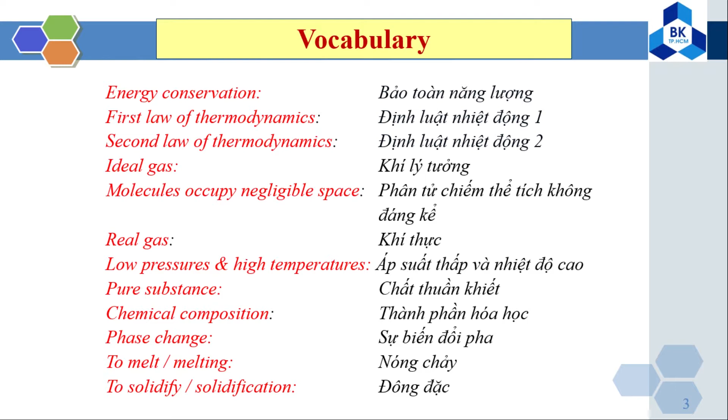Phase change. To melt. Melting. To solidify. Solidification. To boil. Boiling. To condense. Condensation. To sublimate. Sublimation.

Compressed liquid. Saturated. Saturated liquid. Saturated liquid vapor mixture. Saturated vapor. Superheated. Superheated vapor. Quality.

Vapor power cycle. Rankine cycle. Refrigeration cycle. Thermal efficiency. Coefficient. Coefficient of performance.

Alright, so now we start the lesson. First, we will talk about the first law of thermodynamics. As you know, the first law of thermodynamics is actually a different definition of the energy conservation law. They call it the law of conservation of energy, the same. You learned it a long time ago in high school or even secondary school.

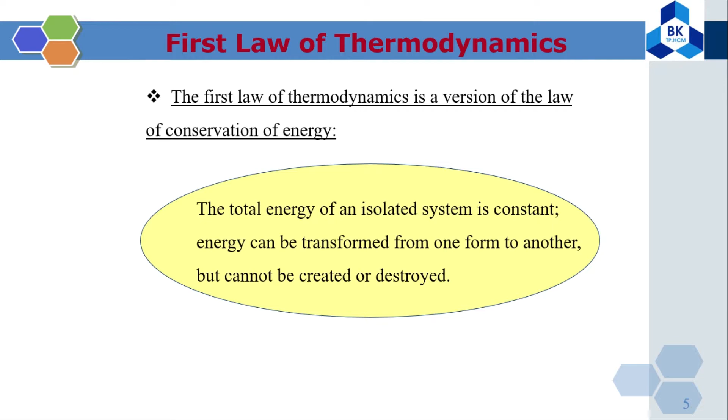They say that the total energy of an isolated system is constant. Energy can be transformed from one form to another, but cannot be created or destroyed. So in an isolated system, energy cannot be destroyed or created, it's just transferred from one form to another. For example, from electrical energy to mechanical in the pump or the turbine, or in a thermodynamic system, it transfers from heat to work.

All right. And for the equation of ideal gas, like last week in the first lesson, we already know that the ideal gas is a hypothetical gas whose molecules occupy negligible space and have no interactions. So it means there are very few molecules, and at high temperature and low pressure, they cannot interact. So that we define as the ideal gas. And again, ideal gas is just hypothetical, meaning it doesn't exist in reality.

But a real gas we can consider as an ideal gas at very low pressure and high temperature. As you know, for a gas at low pressure, the number of molecules is very small, and because of the high temperature, the distance between molecules is very large, so they cannot interact. So in that case, we can consider the real gas as the ideal gas.

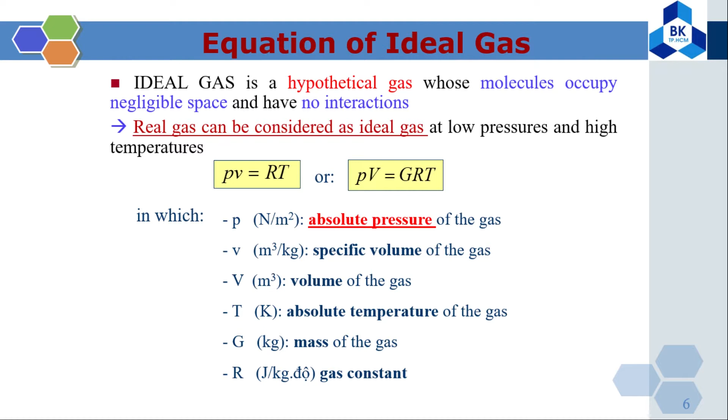And for the equation, you already know it is Pv = RT, which we write for 1 kilogram of gas, or for an amount of G kilograms of gas, we write PV = GRT. In this equation, P is the absolute pressure of the gas, small v is the specific volume of the gas, and capital V is the volume of the gas. T is the absolute temperature of the gas, G is the mass of the gas, and R is the gas constant.

And from Avogadro, we know that R will be equal to R mu divided by mu. In this equation, R mu is equal to 8,314, and we divide by mu. Mu is the molecular weight of 1 kilomole of the gas. For example, the mu of oxygen is 32 kilograms, and the mu of nitrogen is 28 kilograms, etc.

So for a certain gas, if m is mass in kilograms and mu is molecular weight, then the number of kilogram moles of the gas, which we call N, would be given by N equal to m divided by mu, and the unit is kilogram moles. And the molar volume is given by small v equal to capital V divided by N, where N is the number of kilogram moles of the gas. So V is the total volume of the gas.

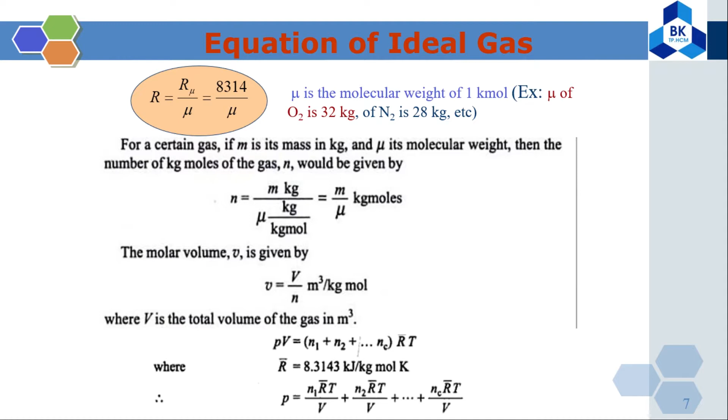So we got PV, where V here is the total volume of the gas, equal to N1 plus N2 plus ... to NC, times R bar and T. And of course, in this equation R bar is equal to 8.314 kilojoules per kilogram mole Kelvin. And from that we got P, the total pressure of the gas. So that is the equation of the gas.

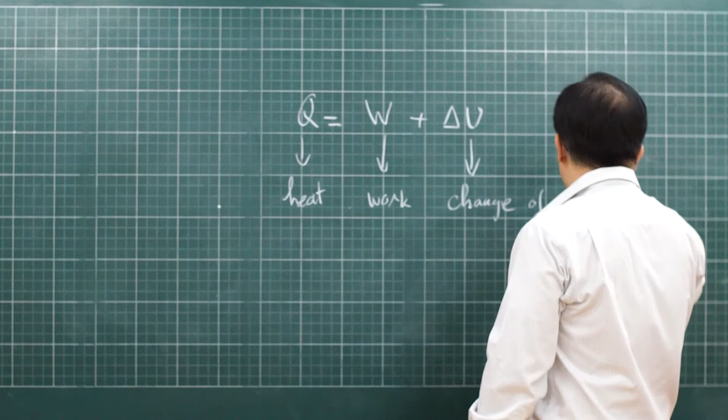Now we jump to the third part. It is the second law of thermodynamics. We know that the first law of thermodynamics does not indicate the direction of the process. So we just write the formula of the first law of thermodynamics: Q equal to W plus delta U. In this equation, Q is the heat, W is the work, U is the internal energy, and delta U is the change of internal energy.

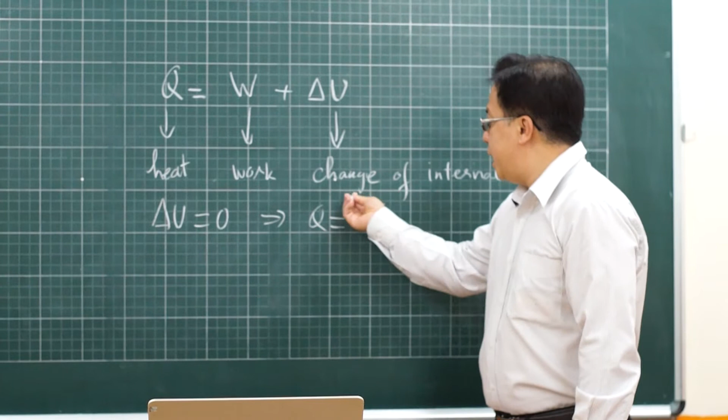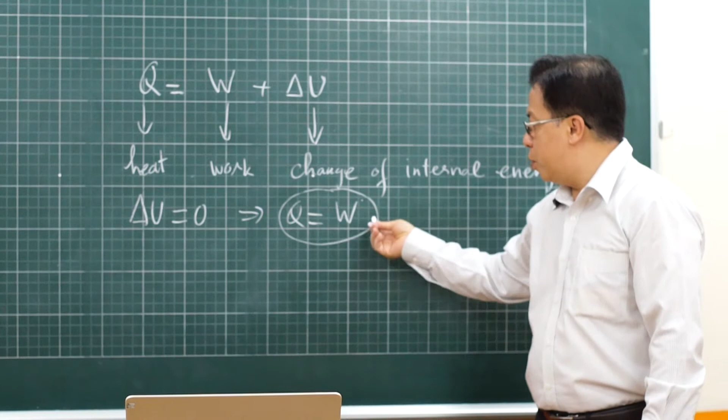For example, in a system, when delta U is equal to zero, we will have Q equal to W. So when we write the first law of thermodynamics in an equation like this, we can say that it means the total heat can be transferred to total work. And in the reverse direction, we can change the total work into heat. But in reality, it doesn't happen like that.

It means work can be transferred to heat. For example, you put the shaft rotating in the water. Later on, you can see the water will warm up. So work is transferred to heat. But it cannot be in the other direction; heat cannot be transferred into work. So you can say that the first law of thermodynamics doesn't explain many natural situations. So we need to use the second law to explain natural situations as follows.

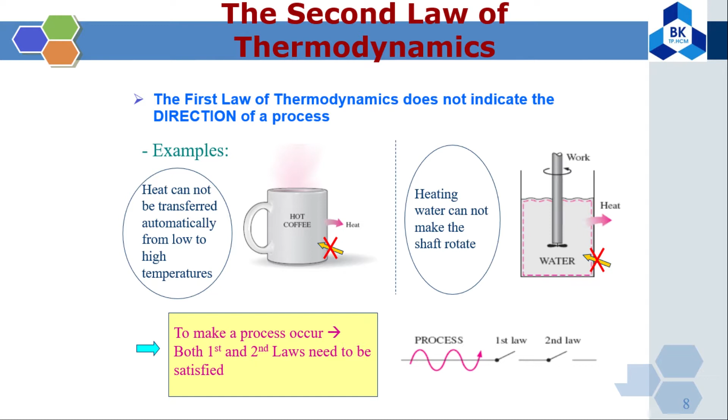So for the second law of thermodynamics, we have two statements. First is the Kelvin-Planck statement, or we call it the heat engine statement. That means this statement applies to the heat engine, and you know that in thermodynamics we focus on the study of the heat engine and refrigeration. Those two systems are the objects of thermodynamics.

And last week we already gave examples like a motorbike or the internal combustion engine. That is the heat engine, and the refrigerator or air conditioner is the refrigeration system. Those are the two objects of thermodynamics. So now we go to the first statement, which applies to the heat engine.

Kelvin and Planck say that it is impossible to devise a cyclically operating device, the sole effect of which is to absorb energy in the form of heat from a single thermal reservoir and to deliver an equivalent amount of work. Or we can say in short form, it is impossible to build a heat engine that has 100% thermal efficiency. Alright, so look at this example.

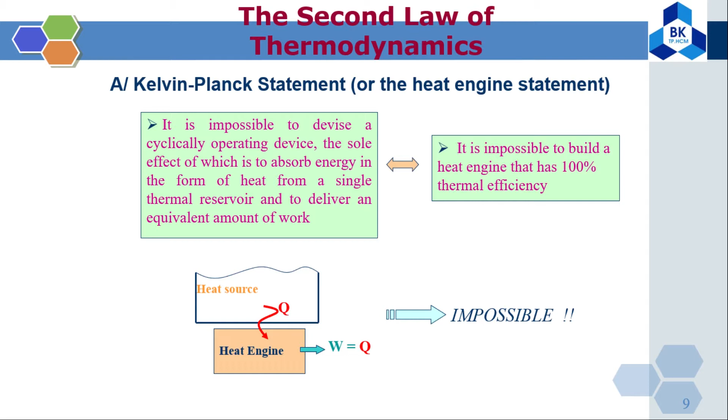So that's why we have the idea of thermal efficiency. For example, look at the diagram of one heat engine. We have a turbine here. First we have a boiler. The boiler receives the heat from the hot source, Q in, and that steam goes into the turbine, and the turbine creates the work W out.

Then it has to transfer part of the heat into the cold sink. In this case, it goes into the condenser, and this condenser releases the heat to the cold sink with the amount of Q out. And then it goes back to the pump. It receives a work W in and goes back to the boiler and makes the cycle. So this is the cycle of the heat engine.

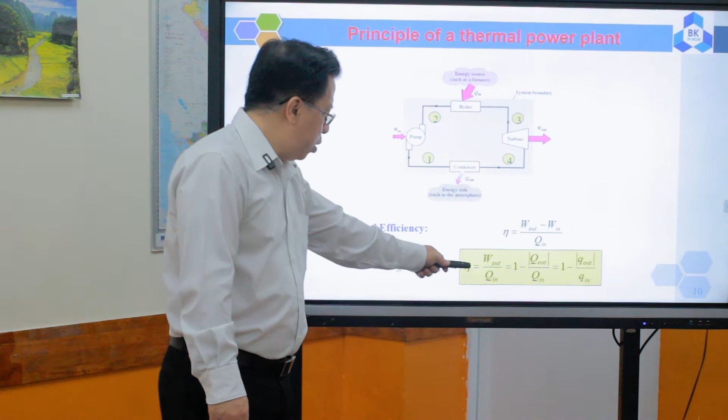And because it receives the heat Q in from the hot source and releases Q out to the cold sink, we have the thermal efficiency defined as eta equal to W out minus W in divided by Q in. And because W in is smaller than W out, we can ignore W in, because W in is just the amount of work consumed by the pump, and this amount of energy is very small compared to the energy created by the turbine. So in this formula we can just ignore W in, and rewrite the formula as eta equal to W out divided by Q in.

And it will be equal to 1 minus Q out divided by Q in. And because Q out is the released energy, it has a negative value. So in this equation, we just consider the absolute value. So we put Q out in the absolute symbol. So it means we have eta equal to 1 minus Q out divided by Q in.

So the statement of Kelvin and Planck says that we need Q out and Q in. So that's why Q out must be different from 0. So eta here is definitely smaller than 1, or smaller than 100%. So that is the statement of Kelvin and Planck applied to the heat engine.

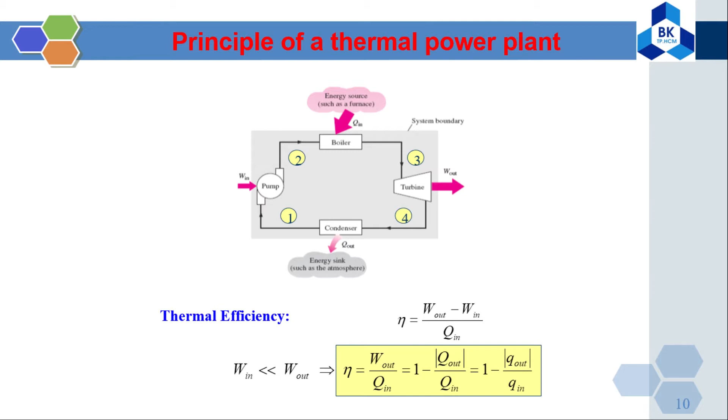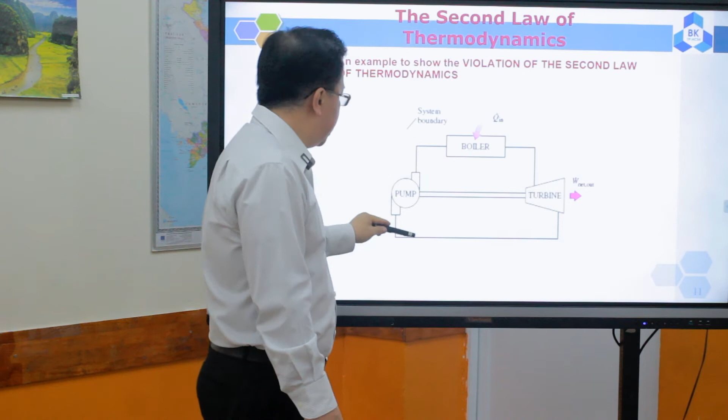And this example shows you something that would violate the second law of thermodynamics. It's the same picture you had in the previous slide, but in this case, you see that there's no condenser here. That means there's no heat released to the cold sink. So this engine definitely cannot happen, because if it happened, it would only receive heat from one source, or one energy reservoir. If this happened, you could say that Q in equals W. So it violates the statement of the second law of thermodynamics.

So that is the statement for the heat engine. Now we go to the second statement, of Clausius. We call it the Clausius statement, and it is applied to the refrigeration system. The statement says that it is impossible to construct a device which operates on a cycle and produces no other effect than the transfer of heat from a cooler body to a hotter body.

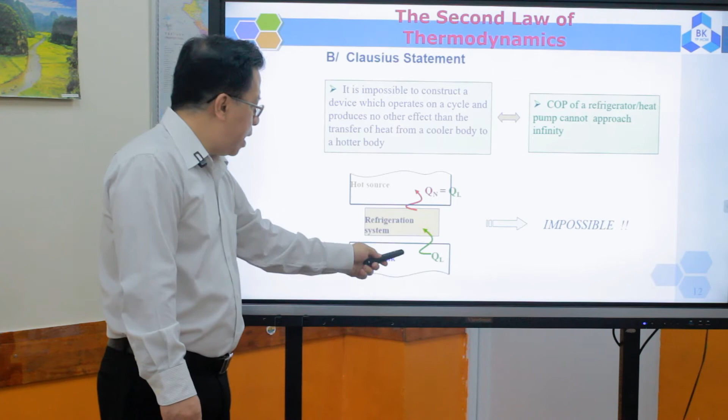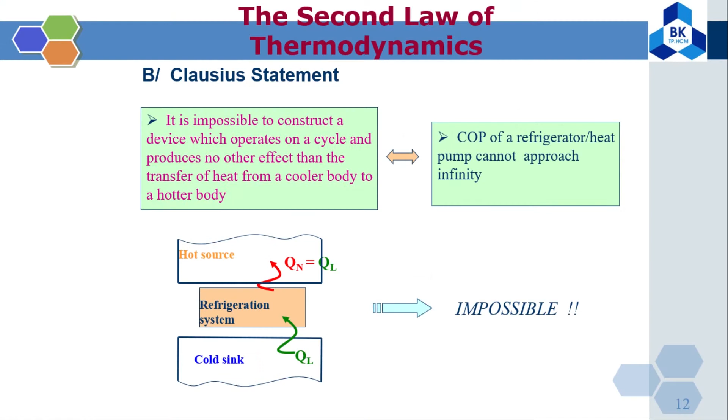Okay, so look at this example. Here, it receives the heat from the cold sink and transfers it to the hot source. And this happens with no outside work provided to the system, and in this case, QN will be equal to QL. That is impossible. All right. So the Clausius statement says that it is impossible to transfer heat from a lower temperature place to a higher temperature place without consuming any outside energy. That is the Clausius statement.

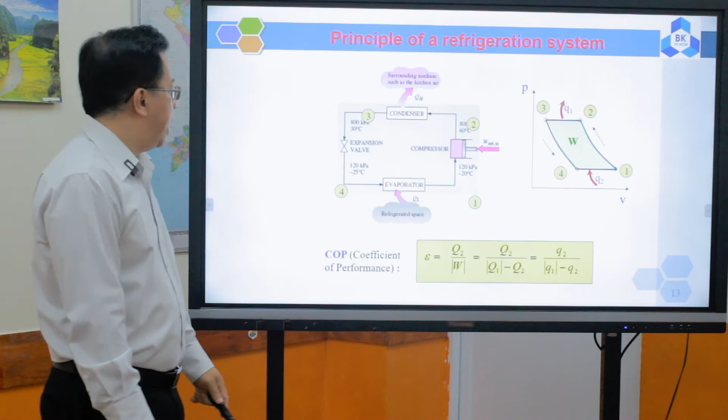And again, look at the diagram of refrigeration. We've got a compressor here. It will compress the vapor to high pressure and high temperature. It goes into the condenser, releases the heat to the hot source, an amount of QH, and after that it goes to the expansion valve, down to the evaporator. At the evaporator, the substance will evaporate and absorb the heat from the cold sink.

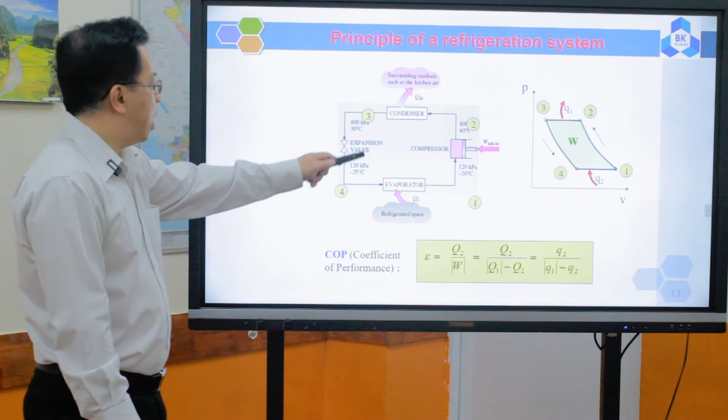So this is the diagram of the refrigeration system, and it will be represented in the PV diagram as the next picture. And we have the coefficient of performance of the refrigeration. We call it epsilon, equal to Q2 divided by the absolute value of W. As you know, we already defined that the work produced has a positive value, and the work received has a negative value. In this case, that is the work received, so we just use the absolute value, so we put in the absolute symbol.

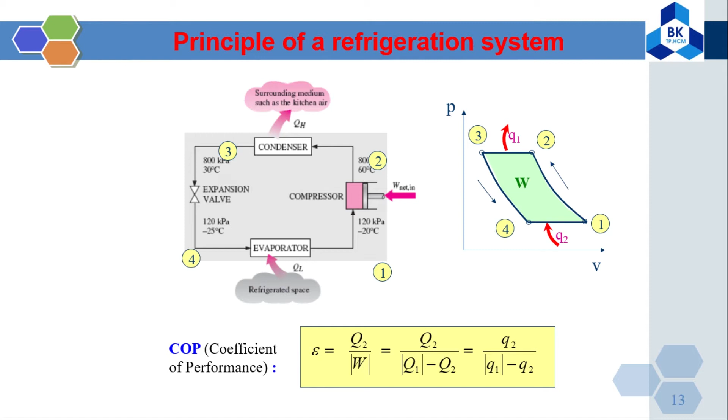So epsilon will be equal to Q2 divided by the absolute value of Q1 minus Q2. And again, because Q1 is the released heat, it has a negative value, so in this case we just consider the absolute amount. So we have Q2 divided by absolute Q1 minus Q2. So this value cannot be infinity. All right, so that is the second law of thermodynamics.

Now we go into the next part, that is pure substances and their applications. So what is a pure substance? Pure substances are defined as substances that have a fixed chemical composition. The chemical composition of this substance is fixed; it doesn't change. For example, for water, the formula is H2O. This is fixed, it doesn't change. So that means we call water a pure substance.

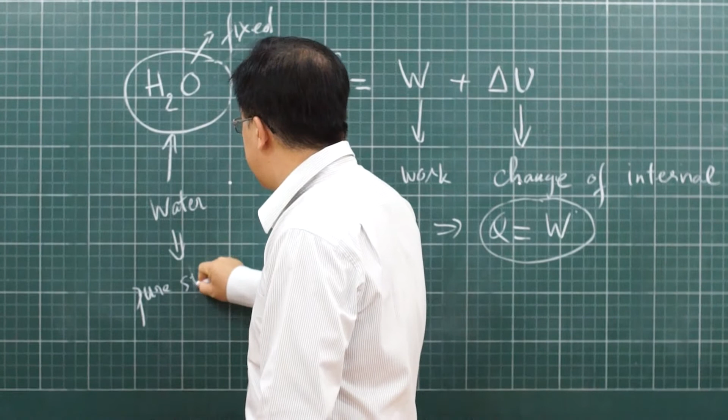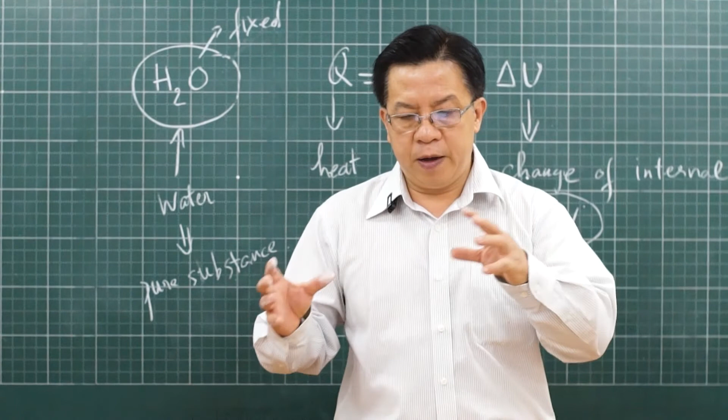Okay, so that is one example of a pure substance. Normally we go through water as the pure substance first, and then this will be applied to all substances, like the refrigerant that you use in the refrigeration system. It's also a pure substance. As you have long known, every substance can exist in three phases, depending on the temperature and pressure: solid, liquid, and gas.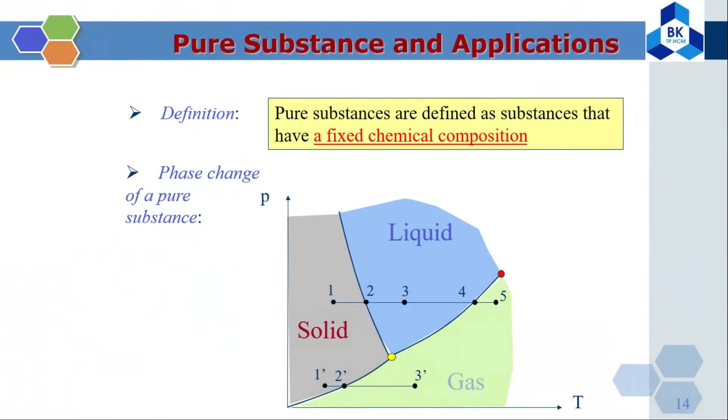The substance can exist naturally in different phases. And the process of changing from one phase to another has a different name. For example, from solid to liquid, we call this process melting. For example, ice is the solid form of water. If you put the ice outside the refrigerator, at the normal temperature of the atmosphere, the ice starts to melt. So the process of changing from solid to liquid phase we call melting.

The opposite process, from liquid to solid, we call solidify, or solidification. For example, you put water into the refrigerator, and later on the water will solidify and become solid. Now when liquid transfers to gas, we call that process boiling. For example, when you heat the water, later the water starts to boil, changing from liquid to gas. The opposite process, from gas to liquid, we call condensation.

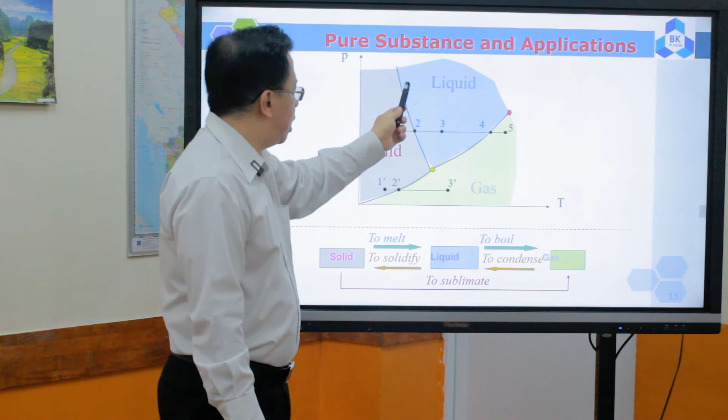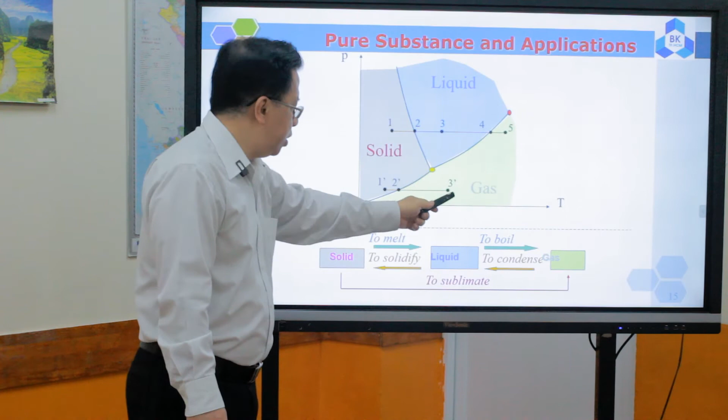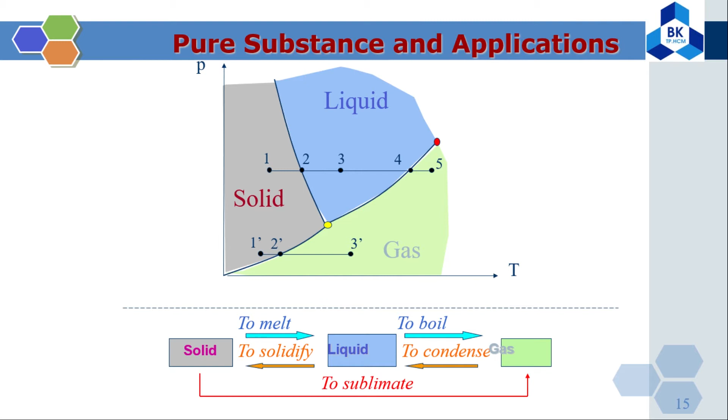And at a certain pressure and temperature, or we can say at very low temperature and low pressure, a solid can be transferred directly to gas without going through the liquid. Normally, materials transfer from solid to liquid and then gas. But at a certain pressure and temperature, it can transfer directly from solid to gas without liquefaction. The process of changing directly from solid to gas we call sublimation. All right.

Now we just look at normal atmospheric conditions. That means the materials go from liquid to vapor. It doesn't go directly from solid to vapor, as you will learn in this subject in Vietnamese. It will go through first what we call the liquid.

For example, now we are at state 1, the water at 20 degrees and at atmospheric pressure, that means 1 atmosphere. We start heating the water, and the water heats up, and when it reaches 100 degrees at 1 atmosphere of pressure, the water becomes saturated liquid. Okay, so from the saturated liquid, the water starts to evaporate.

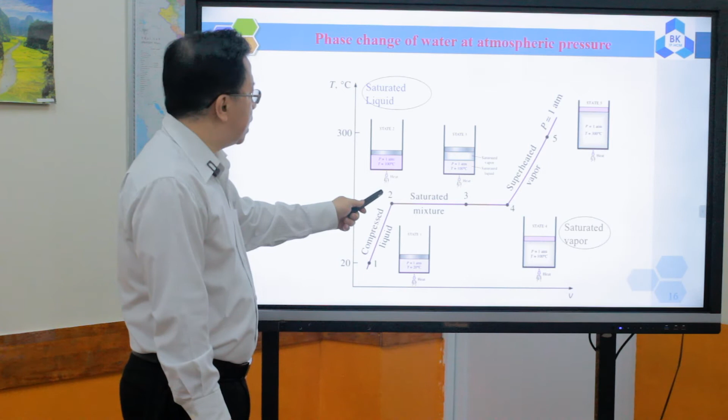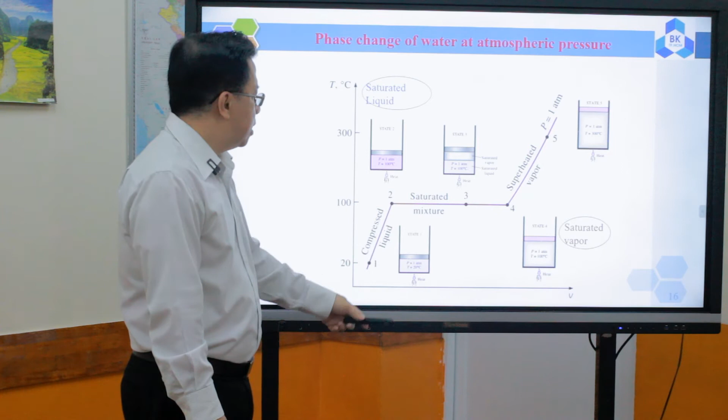So you can see that state 1 here is a liquid, state 2 we call the saturated liquid, and state 3 is a saturated liquid-vapor mixture. Look at the example here. It is state 3. You have saturated vapor and part is saturated liquid. So it is a mixture of saturated vapor and saturated liquid.

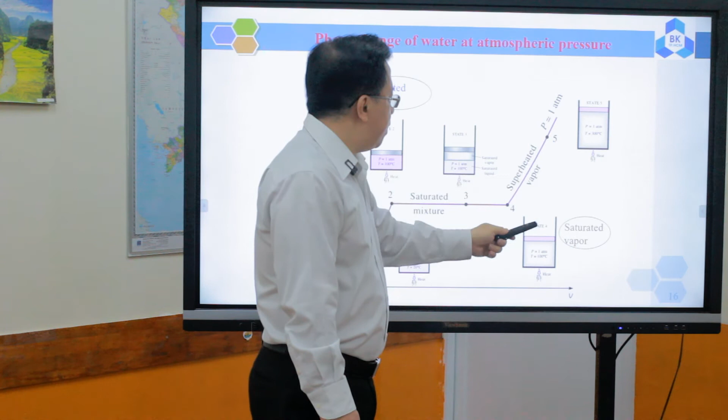And then we continue to provide heat, and later, when all the saturated liquid transfers into saturated vapor, we get state number 4. At state 4 there's no liquid anymore; it is purely 100% vapor. So this stage we call the saturated vapor. And when it has reached the saturated vapor state, if we continue to provide heat, it will move to state 5, and state 5 we call the superheated vapor.

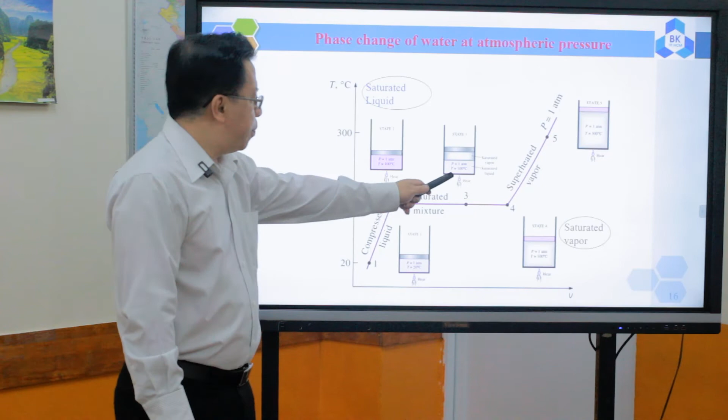To summarize, when we heat up water or any pure substance, it will go through 5 states: first is compressed liquid, second is saturated liquid, third is saturated mixture, that means the mixture of vapor and liquid, then saturated vapor, and the last one is superheated vapor. And if we do it at different pressures, in the end we get this diagram.

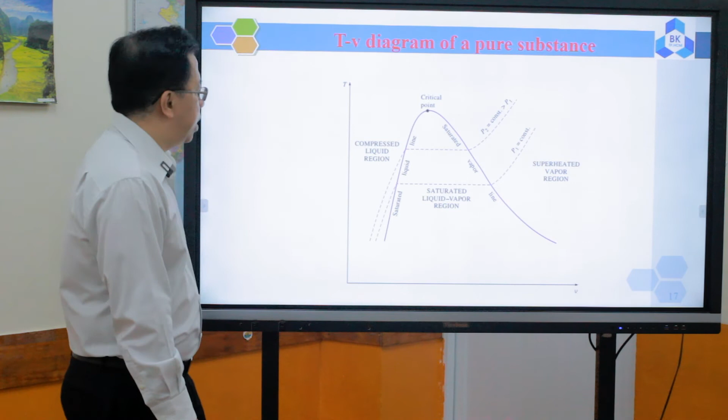So this diagram first has 2 main lines. The line on your left we call the saturated liquid line. That means this line is the combination of all states of saturated liquid. And on the right, we have the saturated vapor line, the combination of all the saturated vapor points. And the point where the saturated liquid line and the saturated vapor line meet is called the critical point.

So these two lines divide the diagram into three zones. The left zone we call the compressed liquid region. The second region, between the two lines, we call the saturated liquid-vapor region. And the last one, right of the saturated vapor line, is the superheated vapor region.

So if you look at this diagram, you can see the 5 states. State 1 will be in this area. State 2 will be on the saturated liquid line. State 3 is in the saturated liquid and vapor region. State 4 is on the saturated vapor line, and state 5 is in the superheated vapor region. It's just at different temperatures and different pressures.

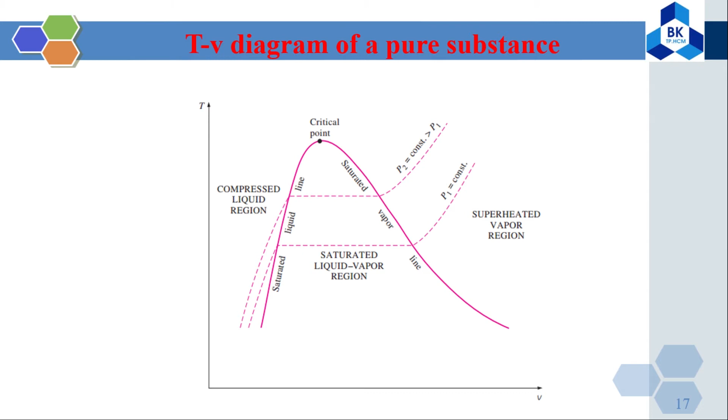So now the properties of a pure substance. How do we determine the properties of a pure substance? There are 2 ways. The first is we use tables. There are 2 property tables to determine all 5 states. Our target is to determine the properties of all the states here: state 1, state 2, state 3, state 4, state 5.

For the compressed liquid at state 1, we use the table called the properties of compressed liquid and superheated vapor. So you use the first kind of table to determine the properties of state 1. For state 2, state 3, and state 4, called the saturated states, we use the second type of table, called the properties of saturated states.

For the saturated liquid, we have it on this line. For the saturated vapor, we have it on this line. And point 3 is a mixture of liquid and vapor. For the saturated liquid, there's no vapor existing, so in this case the quality X equals 0. Whereas for saturated vapor, there's no liquid existing, so the quality X will be equal to 1.

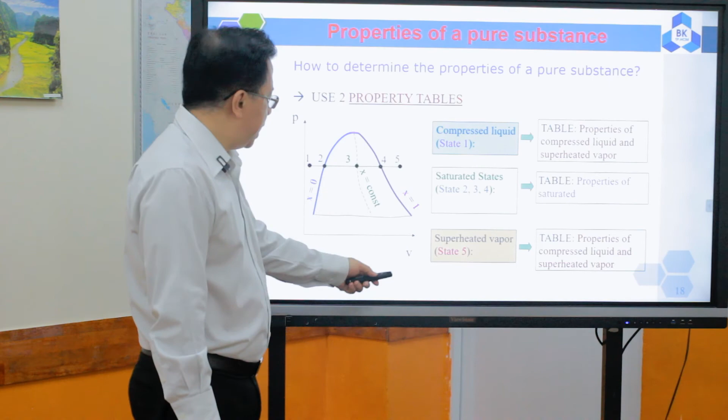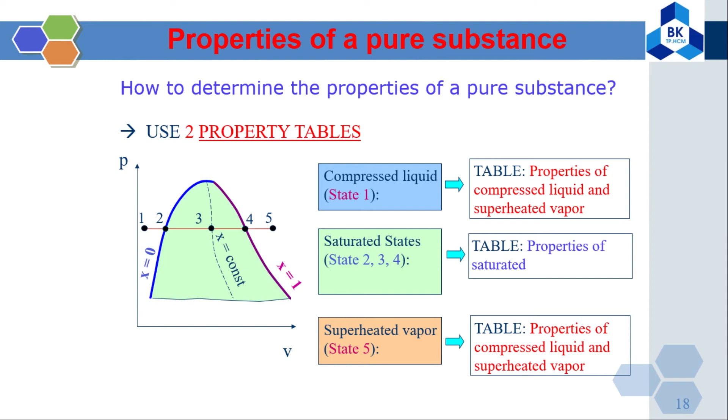The last one, for the superheated vapor at state 5, again we use the table that we used for state 1, which contains the properties of the compressed liquid and the superheated vapor. For the table of properties of compressed liquid water and superheated water vapor, we need 2 independent properties. As you learned in the last lesson, in order to determine one state, we need 2 independent properties. In this case, we need pressure and temperature. So when we know the pressure and temperature, we can find out other properties like specific volume.

Enthalpy and entropy. For example, look at the table here: the first column is the pressure, and the row is the temperature. So for example, you know the water at pressure 1 bar and temperature 100 degrees. You look at this table and find out all the properties.

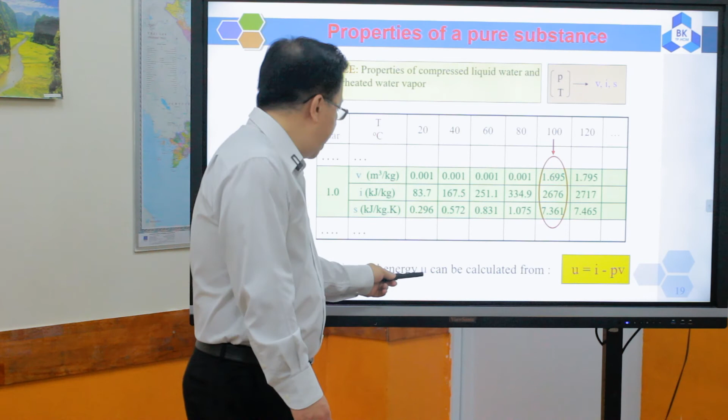Like the specific volume V, the enthalpy I, and the entropy S. There are 6 properties total, including pressure, temperature, specific volume, enthalpy, entropy, and internal energy. For internal energy, the formula is U equals I minus PV, so we can find the internal energy of this point.

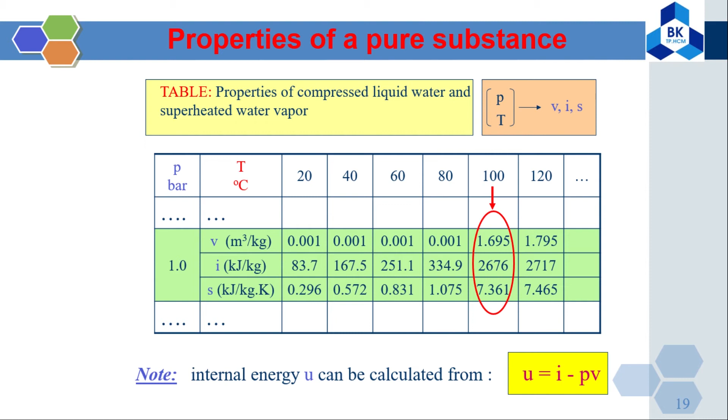So that means with this table we find state 1 and state 5. And for states 2, 3, and 4, we use the table of properties of the saturated water.

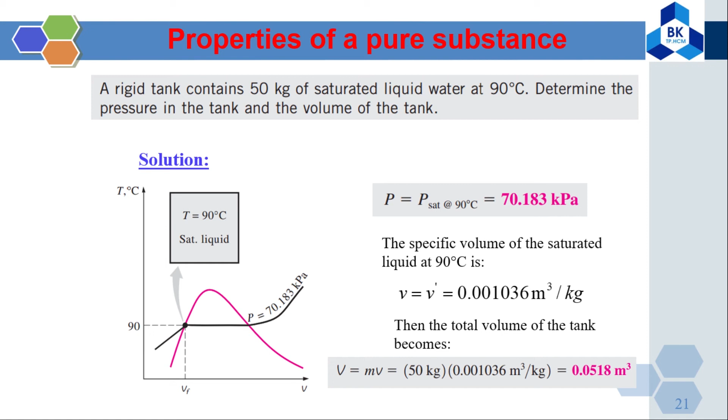And then if there is a total of 50 kilograms of the saturated liquid in the tank, we multiply by 50. So in this case, we find the volume of the 50 kilograms of saturated liquid.

Okay, so that is about the pure substance and how to determine the properties of the substance. Now we will apply it to two cycles: the vapor power cycle, also called the Rankine cycle, and the refrigeration cycle.

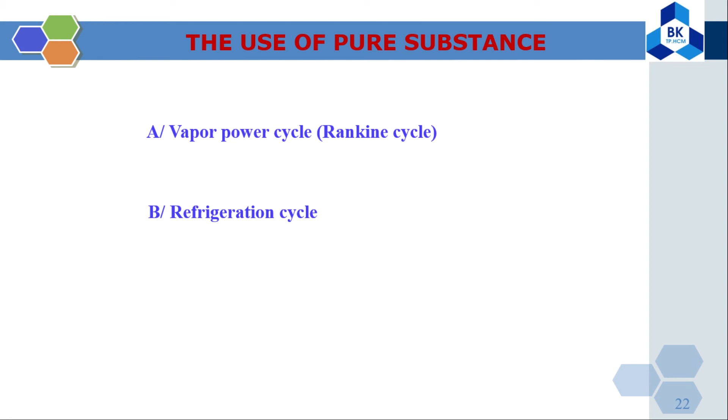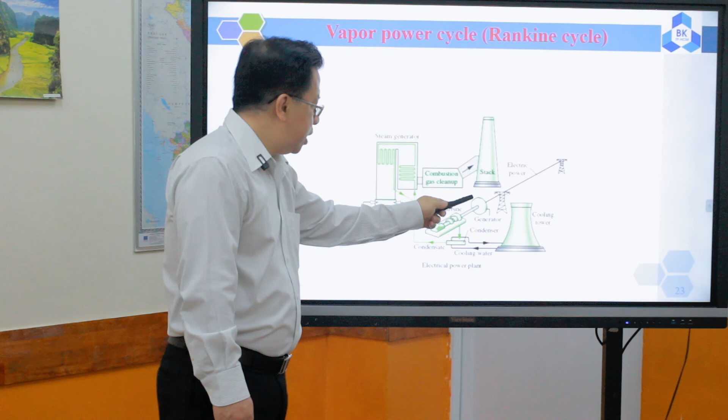The coal here provides coal to generate steam, and the steam will go into the turbine and make the turbine rotate. The turbine connects to the generator, the generator runs and produces electricity, and electricity is transferred to the electrical line or electrical grid.

Then after the steam goes through the turbine, it needs to go down to the condenser. This is the cold sink in order to condense it into the condensate, which goes back to the steam generator, completing one cycle. And of course, the exhausted gas or cold combustion gas will go to the stack and be released to the atmosphere. So this is the diagram of the thermal power plant.

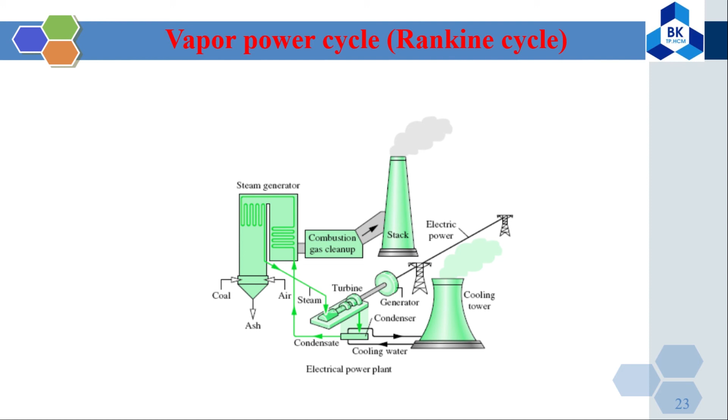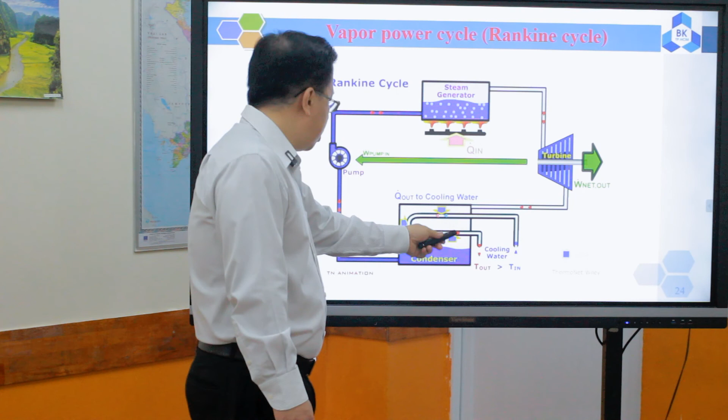And this one we call the Rankine cycle. The steam generator provides steam to run the turbine, and the turbine provides the work to rotate the generator to produce electricity. After that, the steam goes back to the condenser and releases heat, becoming condensate, and it goes back to the boiler by the pump. So that is the picture showing how the thermal power plant works.

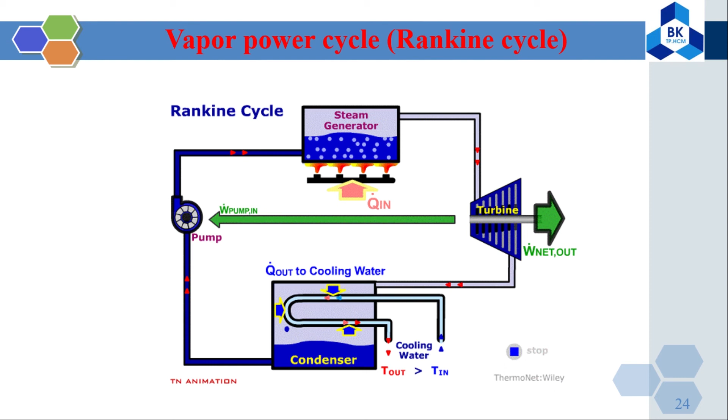And for the thermal power plant, of course, we use the thermal efficiency to find out how good or how efficient the thermal power plant is. So we have ηT equal to W1 minus WP, where WP is the power consumed by the pump, divided by Q1.

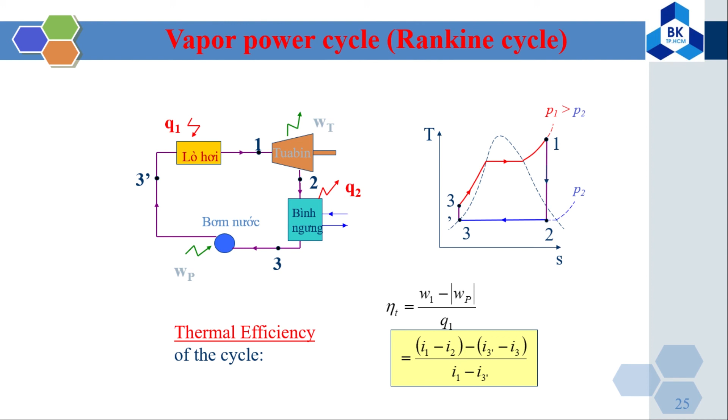In this case, W1 is the work produced in process 1-2, so it will be equal to enthalpy I1 minus I2. For the pump, that is the energy consumed in process 3-3 comma, so we got I3 comma minus I3, divided by Q1. Q1 is the energy received in process 3-1, so it is equal to I1 minus I3 comma.

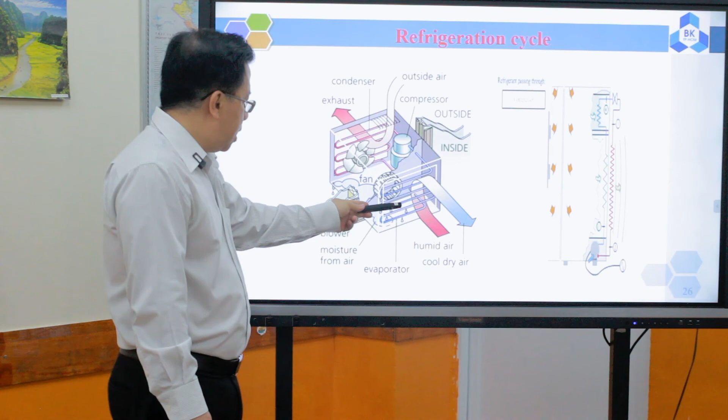So we've got the fan here, and inside we have the evaporator. The hot, warm air from the room will be absorbed into the evaporator, and it will be cooled down and go out as cool, dry air.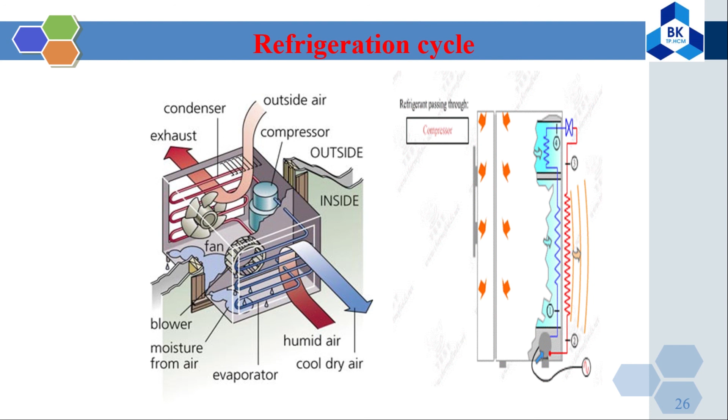And in order to increase the heat transfer coefficient, they use the fan or blower to make the air in the room move faster. We call this forced convection heat transfer. On the outside, we have the condenser, and again, to increase the heat transfer process, they use a fan here, and of course we have the compressor here. So that is a window air conditioner.

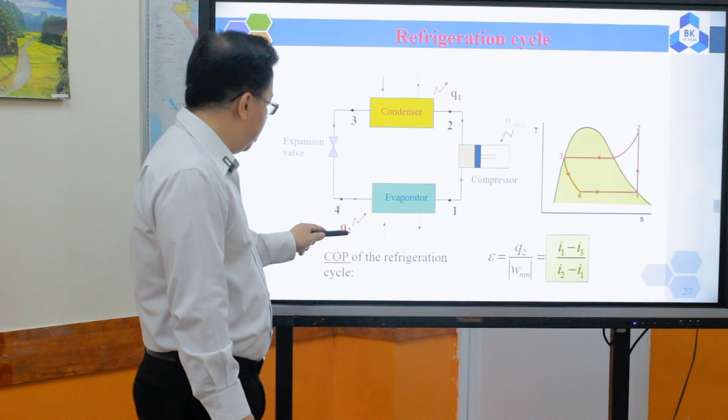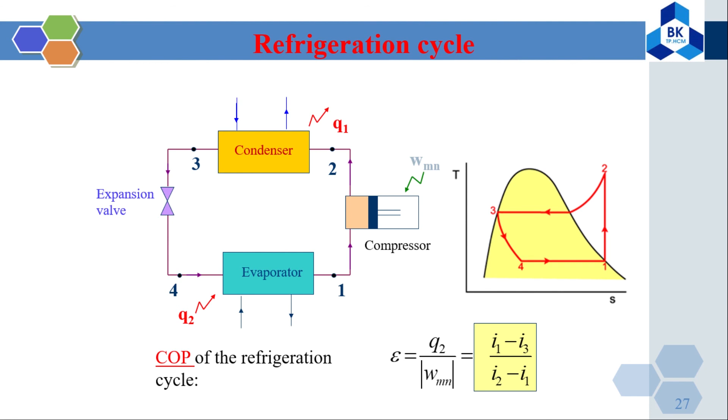The gas goes to the evaporator, where it evaporates and absorbs heat Q2 from the cold sink, and the cycle starts again. In order to know how good the refrigeration system works, they use the COP, which stands for coefficient of performance: epsilon equal to Q2 divided by the absolute value of the work of the compressor.

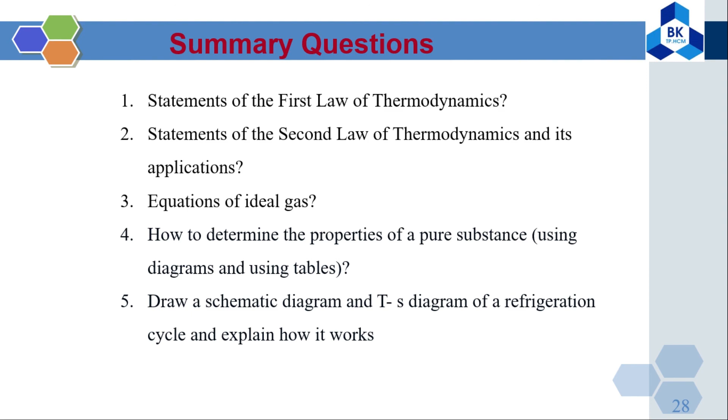Okay, so that is about the second lesson in thermodynamics.